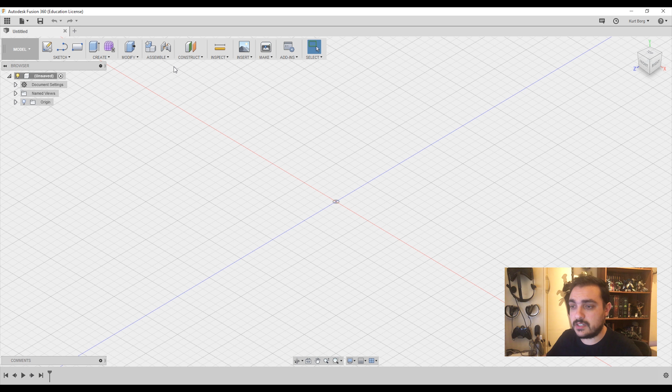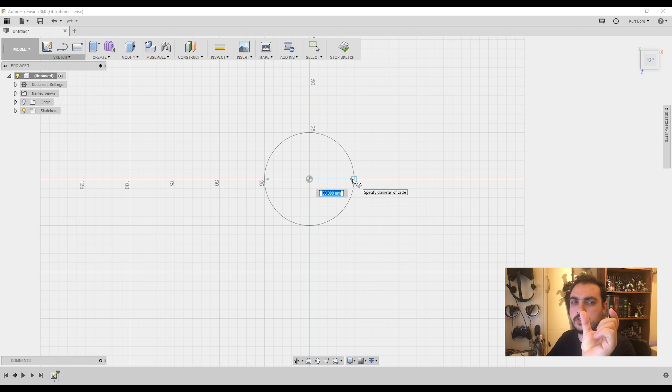I'll be starting out by drawing a circle. You start by going into the sketch menu, click on circle, select the center diameter circle, which is the basic one, and I'm going to make my coin 5 centimeters in diameter. About this big. Yeah, let's go for 5. I can scale it down later. Actually, that reminds me, let's start over.

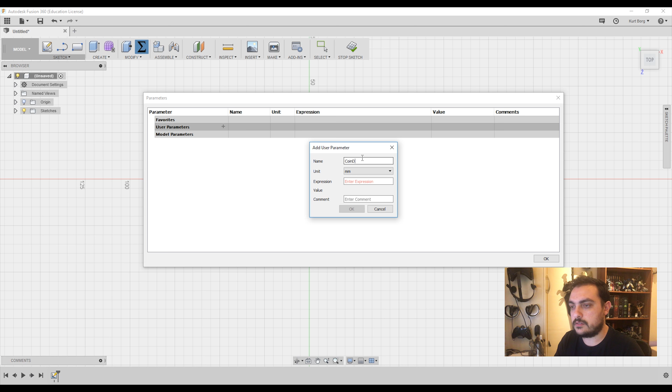One of the greatest features of Fusion 360 is its parametric ability. If you go into Modify and click on Change Parameters, it opens up this menu, which basically shows us all the different parameters you can include. So let's say a new parameter will be the coin diameter, and we'll express it in centimeters. We'll say it is 5 centimeters. No need to enter a comment in my case, and we'll just press OK.

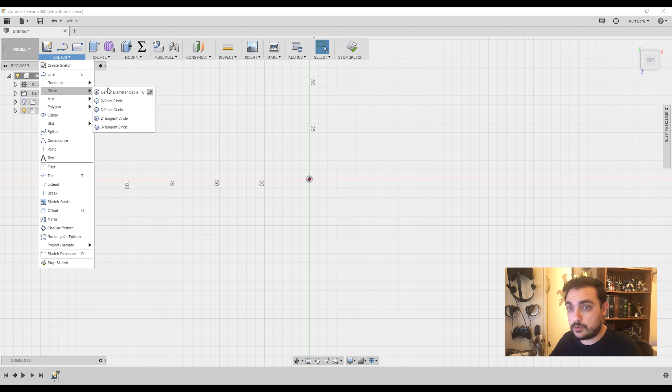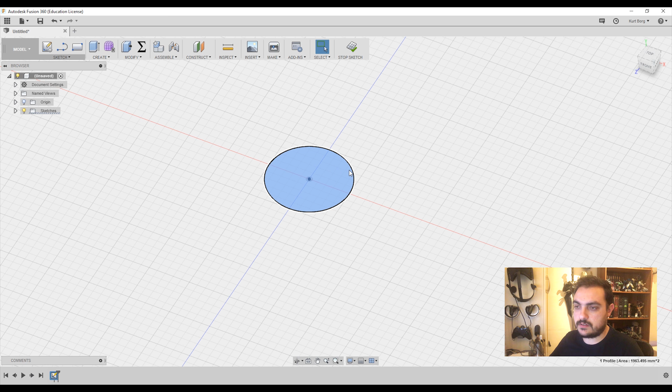Now here's the neat part. If we go to sketch a circle, instead of choosing 5 centimeters, we can choose the coin diameter parameter, and that automatically makes it 50 millimeters, 5 centimeters. Now the great thing about this is: if we try to extrude this, let's say we extrude it by 1 centimeter, and we want it to be larger, you can go to the parameters, double click there, change it to 10, and bish bash bosh, there it is.

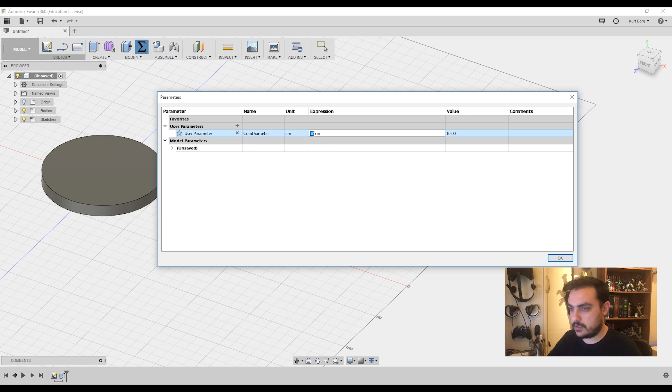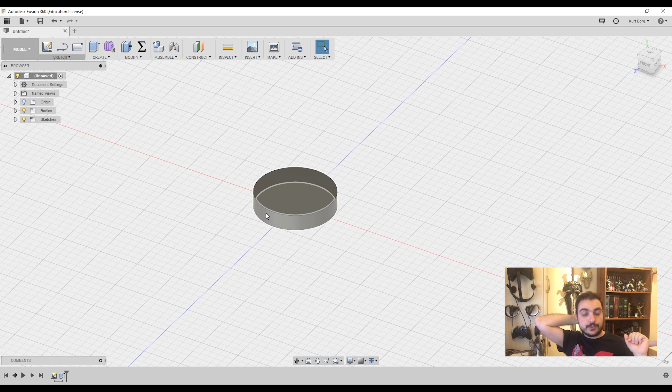So the coin increased in size with us changing the parameters. Maybe we can see it better if we move the menu. Let's go back and make it 5. See? That's a very handy feature, because any kind of modification you make in Fusion 360, if you want to change the original structure or the original sketch, instead of starting over, you can just go into the parameters, change it up, and everything will update accordingly. You can do the same thing by going into the timeline down here, going back as far as you need, double clicking on the function or action that you did, and changing the parameters there. So that is pretty handy.

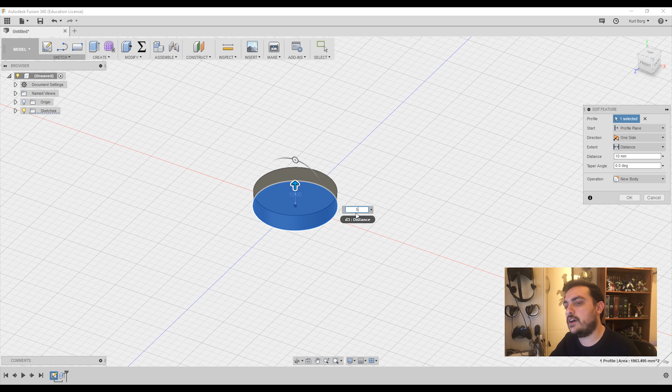Now I don't want the coin to be this thick, so we just go back in the history bar down here, double click on the extrude function. Instead of 10 millimeters, we'll extrude it to, let's say, 5. Alright, so let's have a look at the top. That is a very, very basic coin.

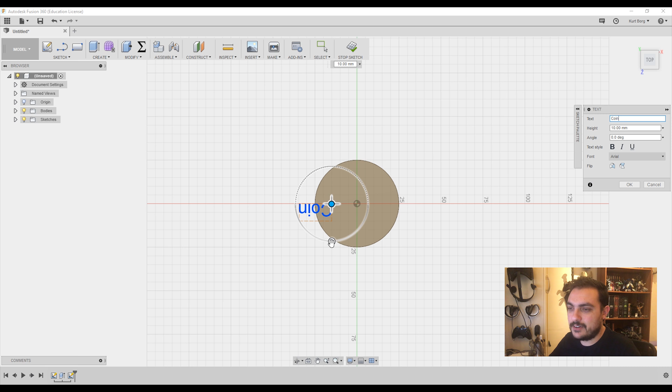Now we can, for example, put text on it. We can create, or sketch rather, text. We click on the surface and put text over here. Let's say 'coin'. We can turn it around, make it face the way we want. Just press OK, highlight the text.

And extrude it, let's say, by 1. Basically what that does is it engraves text in it.

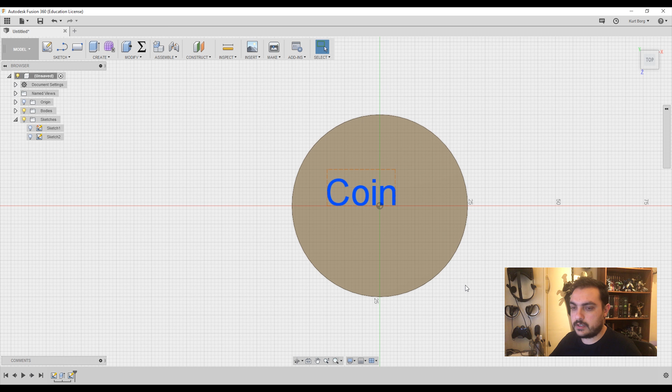Now, let's go back. Let's go back another time. Won't be doing just that. We want something a bit more intricate. Not too intricate, not too complex. We're not doing engineering here. We need something which is quite basic.

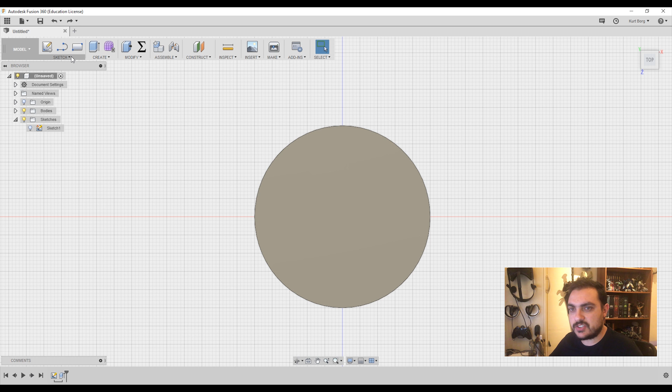For that, let's design a bit of a nicer shape. Let's go and make another circle. We press C, which takes us automatically to a diameter circle. We click on the surface we want to make the circle on, which in this case is the face of the coin. Now, if we selected this far, it will be as large as the coin itself, but we want it a bit dialed back. So let's say 45 millimeters in diameter. It leaves us with a 5 millimeter brim all around.

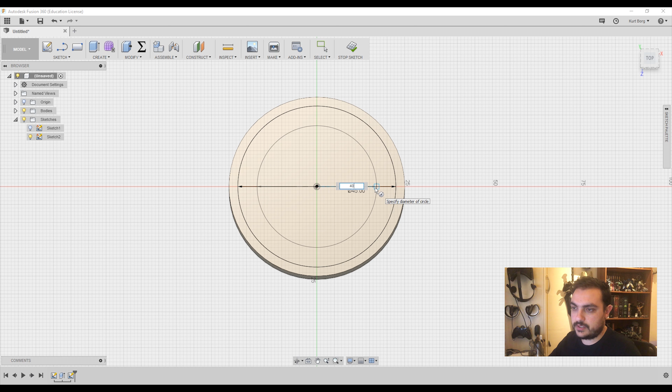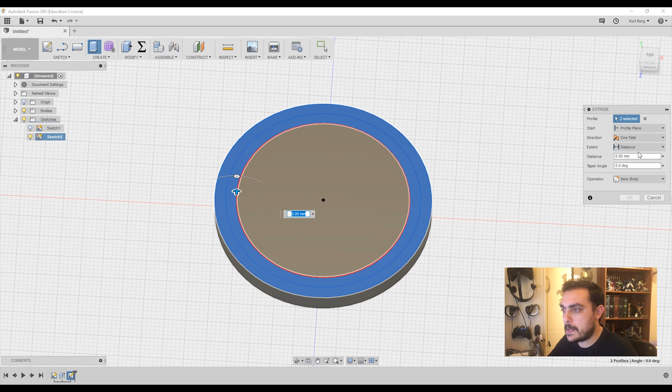And let's do that one more time, now with 40. So we'll select these two circles, these two sections. We can press E for extrude, and we shall extrude at, let's say, another 5 millimeters. So the thickness of the rim will total 1 centimeter.

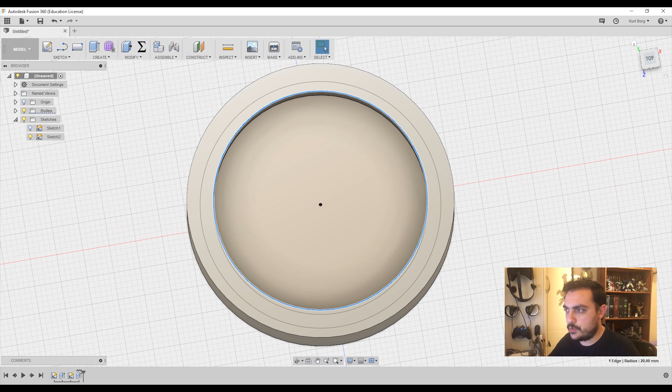Now, basically, if we turn on all the sketches, let's just turn on this one. So we look from the top, we see the circle we made in the middle before. Now this will be found beneath the top surface of the maker's coin. So what I want to do over here is chamfer the edge, and we'll chamfer it by 2.5, which gives us just that.

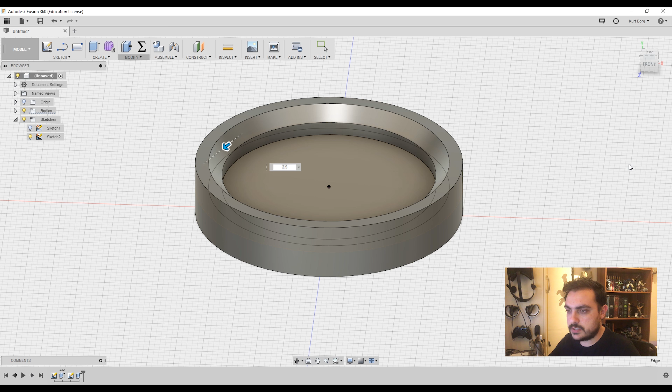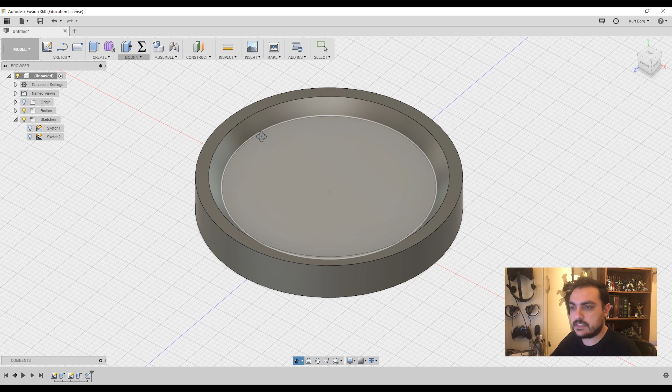Now, I like that, but I don't like this over here. So what we'll do is go back to the extrude, and we shall extrude only 0.5. Basically that fixes it for us. That's quite a nice feature.

So far so good. We may want to chamfer this edge as well. Let's chamfer it, let's say by 1. I think that looks nice, yeah. Yep, I like that.

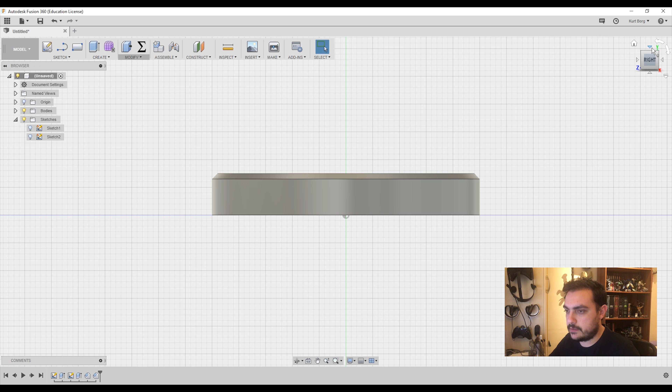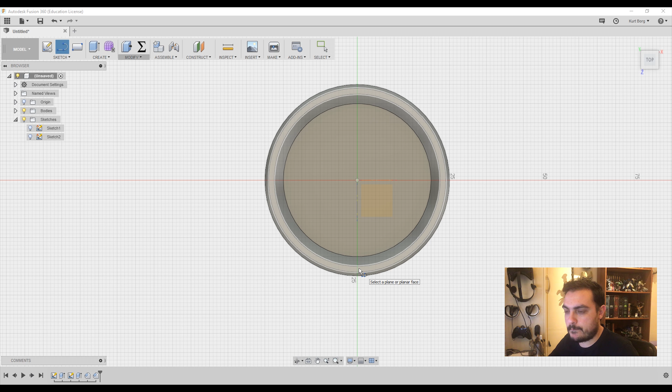Okay, alright. Now, if we go to the top and we sketch a line, let's see. Let us sketch a line over here. Select the surface. We want to select one of the points, ideally this green line. Let's make it easier. Let's sketch a line from there, going to there. It's going to be at 90 degrees, so that locks it. Okay, we're going to go to the edge over here.

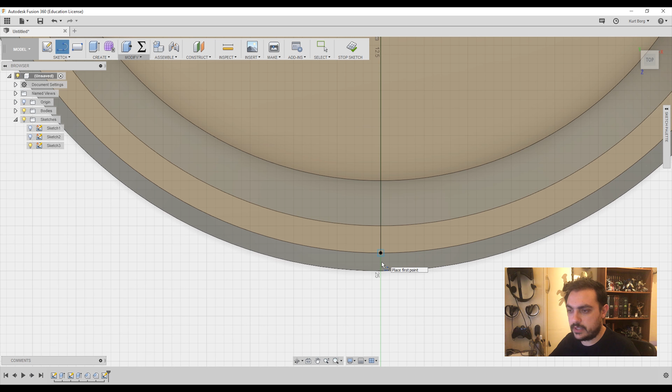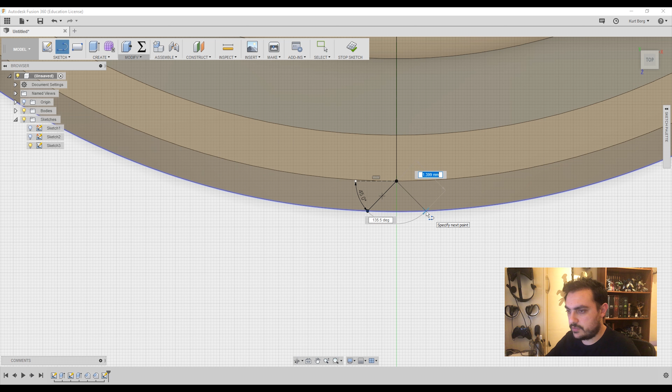Now, if we draw a line at 45 degrees over here, and we make it touch the edge, and we do the same thing over here on the other side, it will be the opposite angle. It should be at 135 degrees over there. That's perfect. There we go. We have a section over there.

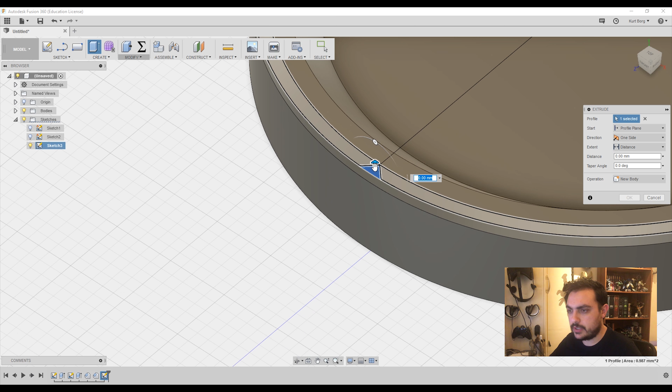So, what do we make of this section, you might ask? What I want to do is extrude it one more time and extrude it down all the way, leaving us with that groove, or a notch, if you will.

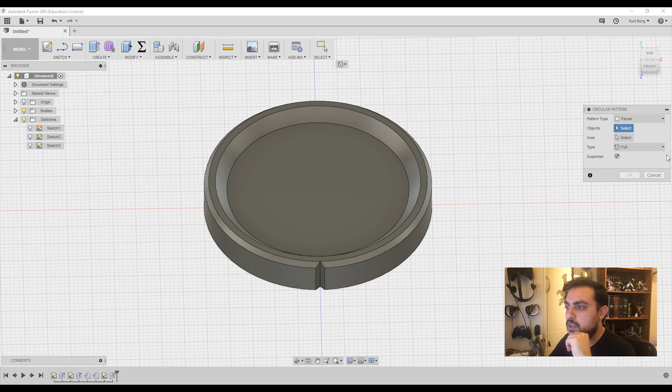Now, here's the nice thing about Fusion 360. I suppose other software does this as well, but we're going to create a pattern, which is going to be a circular pattern. We're going to be selecting faces, okay? So we click that one and that one, two faces. We're going to select the axis, which is going to be the y-axis over here, the green axis.

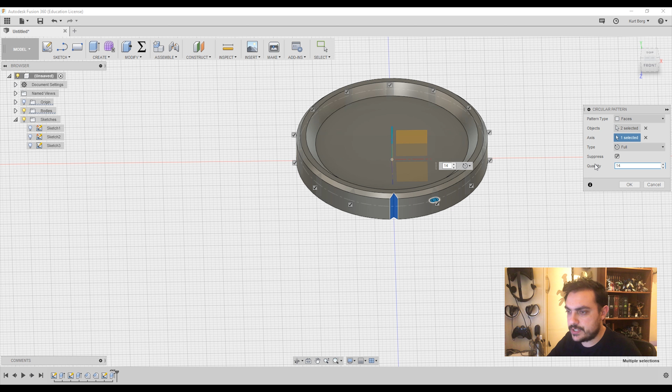And over here we can change how many notches we want. So 3 leaves us with 1 notch over here, 1 over there, and the original one. So let's go for 7, let's go for 14 notches. I like 14 notches, maybe 16. And they will all be equidistant, so I don't know, let's see, 20. 20 is, I think I like 20. Yes, that's right. I like 20. Okay, okie dokie.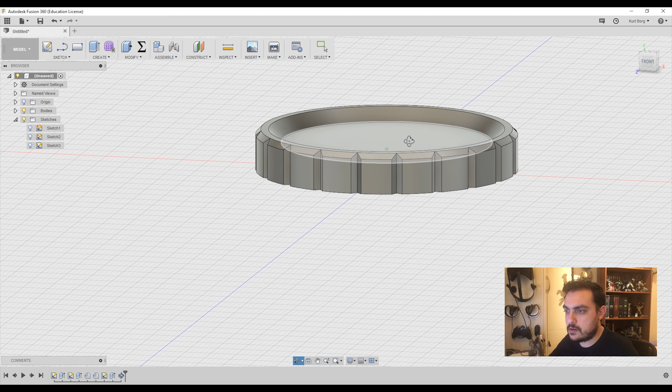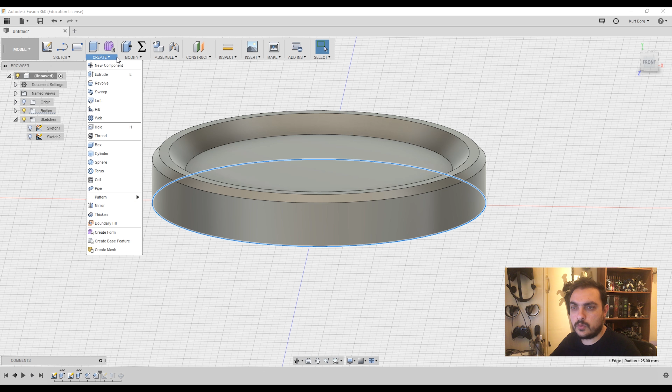Now, and we are nearly done. So let's see how we can embellish it a bit more. Let's go on the sketch down here. Actually, not on this sketch, on some sketch. Let's go 1 point back before we did the pattern, before we extrude and before we did the sketch, and if we select the lower rim, we can chamfer it as well with 1 millimeter to have it equal. Now we move the history point forward, and there we go.

This is what I love about Fusion 360.

You don't have to start over if you make a mistake or change your mind. You just change that.

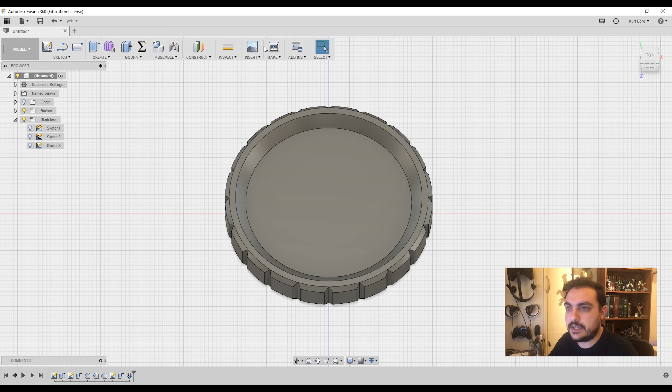A maker's coin usually features a logo or text particular to the maker themselves. For my case, I want to put in my logo of Borg 3D, so we shall insert SVG, select the SVG file, image, and so on.

This is great. I converted it with an online tool. They're usually not very reliable, but in this case I can't complain. So we can scale it up a bit more, try to center it as much as we can, and I think it can go slightly larger. That looks just about right.

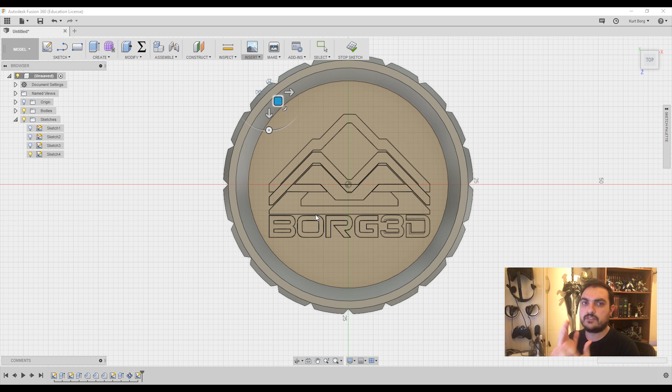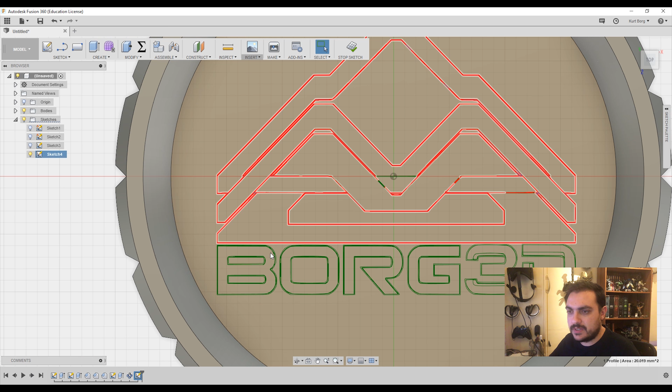Select OK. Now what Fusion 360 is doing is putting the vector on the surface as a sketch, and now we can select the different areas, which is beautiful. There are tiny details because in the actual image there's a white border around it, which usually doesn't appear against a white background, but I'm not going to be extruding this. So I'm just going to be selecting the areas I want to pop out.

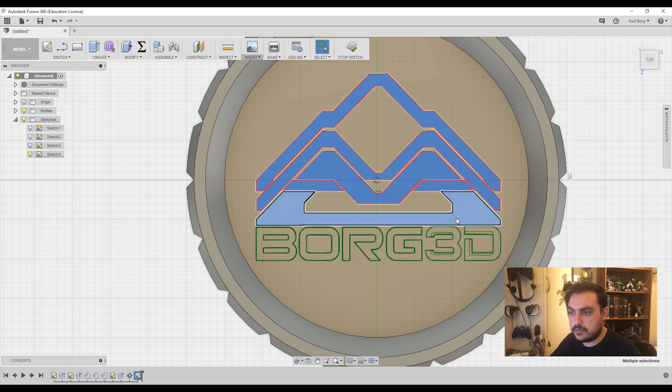We can either engrave them or emboss them. I think I'm going to pull them out, extrude them out. Select the logo, and I'm going to select Borg 3D also.

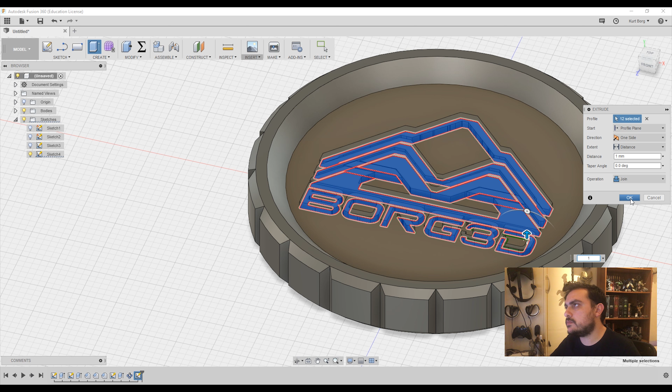If I extrude them by pressing E, I can extrude them by 1 millimeter. I think that's decent, a bit more than 2 layers—actually about 10 layers. Should be fine. Let's see. Okay, that's looking pretty good.

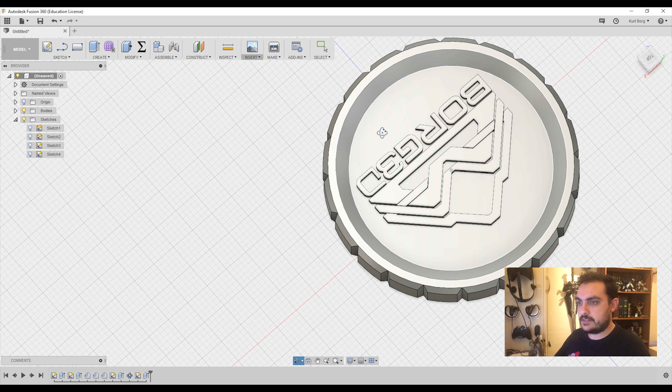I don't like the smooth surface inside, so probably I'm going to be mirroring this effect over here.

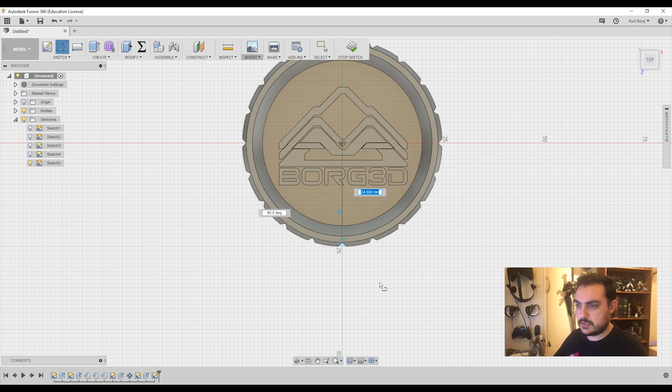If we go to sketch on the surface, we're going to draw a line at 90 degrees, which is perpendicular. We're going to select the coin, then modify to split body. The splitting tool will be that line we drew, and you can see it will split it in half.

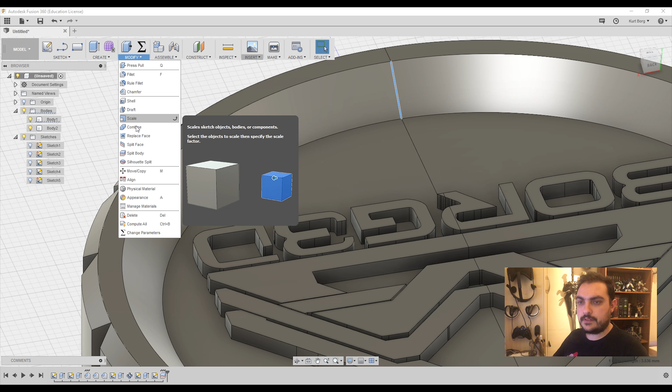Now, if we go to this edge and chamfer it by 1 millimeter, and do the same on the other side, chamfer it by 1 millimeter, you can see what we have over here.

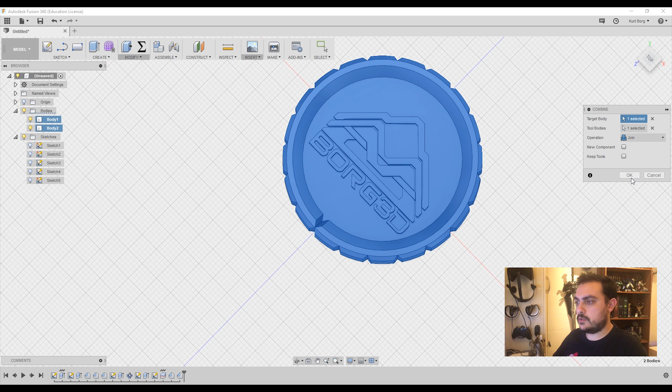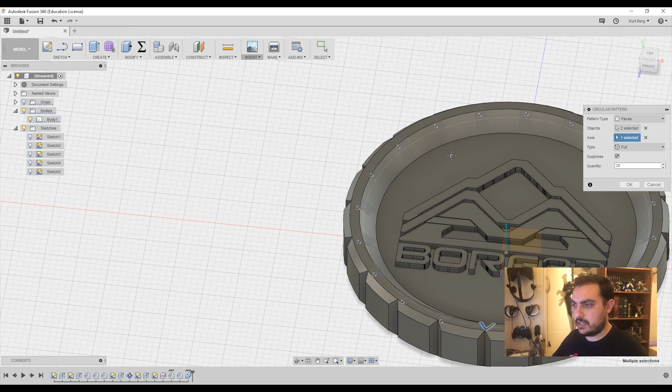Now let us combine both bodies together again by joining them, and we can repeat the pattern with a circular pattern. We select the faces and select the axis, which was the green one. We're going to make 20 in total, just like we had. Given a few seconds to operate because the SVG really slows it down.

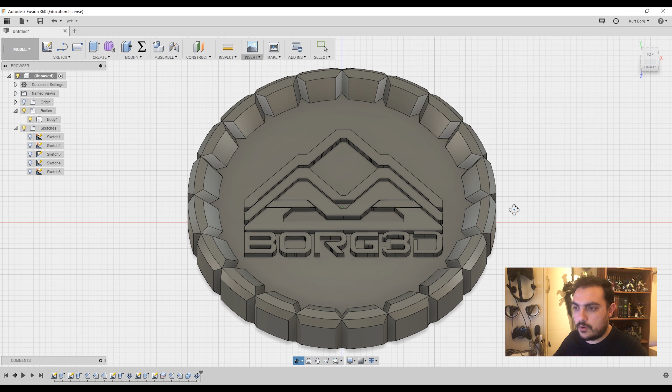There we go. I actually like this texture. Now we'll have to see how this prints and whether it prints well enough on my printer, but I think we can pull this off. I think that's a pretty decent one. And that is how you make a maker's coin on Fusion 360.

Now the next step is to take it down to the printer, which I'll be doing right about now.